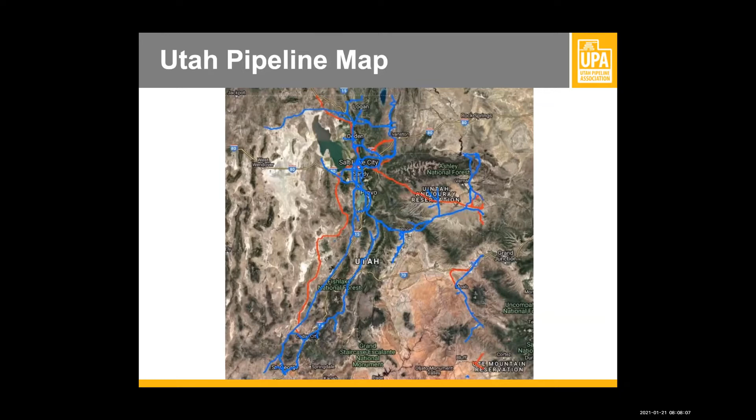I often get asked, what's the depth of our pipe? The only good answer I can say, or what our current running line is, it varies and it depends. The only way to really know is to have that line potholed, because several things can happen over the course of time since the pipe's been in the ground.

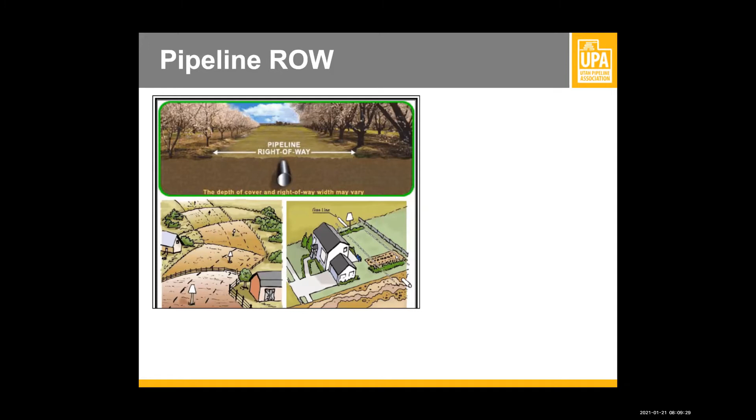There might have been an underground obstacle they had to try to go over or under. As land starts to develop, let's say it's farmland like in the bottom left-hand corner, you might start going through cultivated fields, but then as development progresses, we might have a line that runs behind some homes or close to where people live. In those cases, the grade has a potential to change over time, so the depth of what we initially installed the pipe might not be the depth of where the line's currently at. That's what makes it difficult to answer that question.

We're going to jump over to Coalville for a second. This is a cultivated field that you might end up running into. The only way that you would know that we've got one of these transmission lines running through this area is by a marker right here on the line. And then as time builds up, sometimes we'll even have instances like this where structures will be built right next to the pipeline right-of-way.

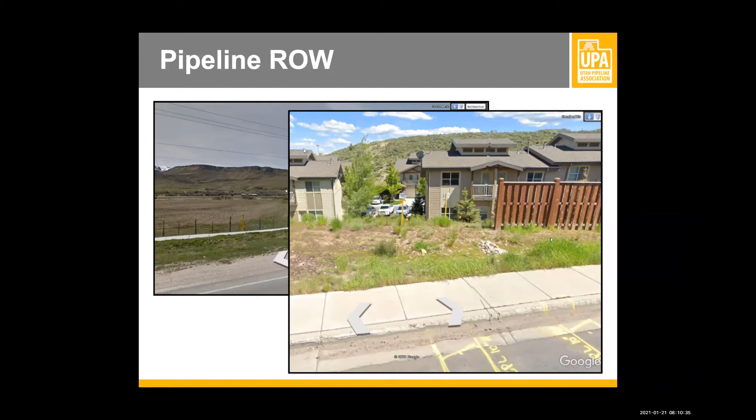It's nice in this photo, you can see that someone had called out and there are some blue stake markings on the ground. It could be in any of these situations, whether there are homes or no homes around, where you potentially could have some of these lines.

Now besides crossing roads, sometimes these lines will end up paralleling a road, whether it's at the current time of installation or future development might come in.

And in that instance, we see up in this upper left corner, there's 2 pipelines that happen to run through a residential area. I'm going to jump over here and talk about this other photo I've got, switching over to Google Earth.

As you can see here, down in the bottom left-hand corner, I've got some markings out on the ground. It says DEG, which stands for Dominion Energy Gas, high pressure 24-inch, and it's running right down the middle of that median.

Now, for an operator like myself, I can't necessarily place markers as we go down the middle of the road, that's not feasible. So I'm going to look around to see where we might find a marker for this line. As I turn, I don't have to go far, and I notice right here that there's a marker indicating the location of one of these transmission lines nearby.

Now, we learned a couple things from this scenario. One, pipeline markers aren't necessarily always above or directly above the pipeline, they're generally in the vicinity of it. And for a case like this where we might parallel the roadway, look for signs or markers that are on the edge of the roadway.

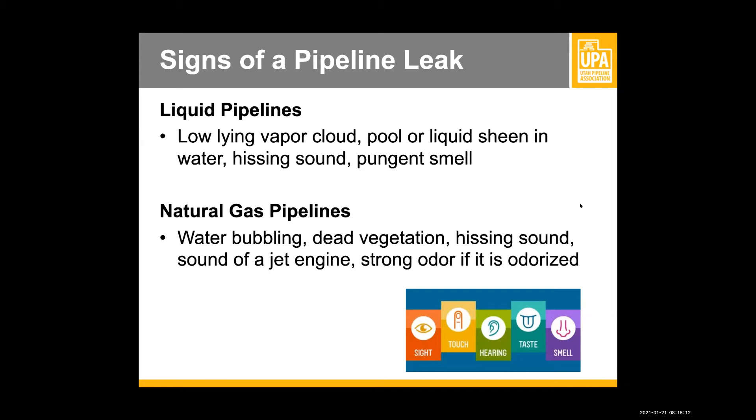It's odorless, and only when it runs in the distribution lines is it typically odorized. So smell is not the only indication of a natural gas leak. Transmission lines, what we've been talking about, generally run in the hundreds of pounds with larger diameter steel lines. But that doesn't mean the smaller lines are necessarily safer to dig around. This instance came up in 2019 in North Carolina, and this was only a 3/4 inch service line that ran from the main into the building, and the line pressure wasn't even very high. So pressure is not necessarily an indication either. It only ran at 4 ounces of pressure, which is 1/4 PSI.

That's usually approximately what all of your appliances run at in your home. What had happened is a horizontal directional drill company had set up a machine and were installing some sort of conduit, and they failed to daylight or pothole the service line when they crossed it. They ended up hitting it, and gas got into the building. The result, as you can see from the photos, 2 individuals died and 25 were injured.

Now, this example about a liquids line is a little older, about 20 years old, but I really liked it because it explains a couple things. One is that it's the fumes from these liquid lines that burn, not the liquid itself. And if it gets into a waterway, as we can see here, the fumes ignite and it can cause the product to spread a lot quicker and cause a lot more damage a lot faster.

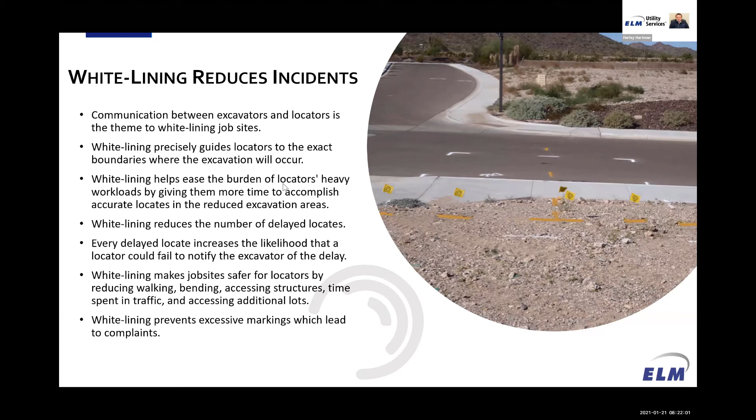White lining prevents excessive markings, which leads to complaints. So some of the reasons to white line every time: information provided by the excavator working in the field is often difficult to describe to the one-call center. Locate tickets called in by office personnel who are often unfamiliar with the physical area can create confusion. This typically results in requesting larger areas for the ease of the requester, but creates unnecessary effort and time spent for the locators.

So some tips for white lining. Identify your company's name and/or blue stake ticket number in the white lined area. Photograph the white line markings and geotag the images with GPS information. Include fixed reference points in your photographs to document your work areas.

Ensure access is available for locators. If you don't have white paint, use white flags or stakes, and when using a single flag or stake, always include the radius of the flag or stake. Ensure location of job site is correct to prevent further delays.

One question we get on white lining is, how do we use white paint in the wintertime? That's where the white flags come in handy. You can still write your ticket number or your company name on that white flag, and the directions on the ticket will lead us to those flags.

What often gets overlooked are the hundreds and possibly even thousands of times damages are prevented by excavators because they went the extra mile to white line the job site. From 12/1 of 19 to 12/1 of 2020, of all the jobs that ELM investigated, only 3.4% of those jobs were white lined. I really believe we've got room for improvement there, and it'll help the communication.

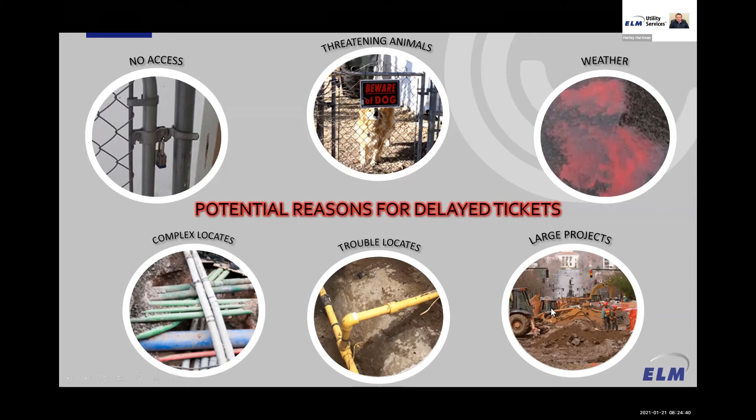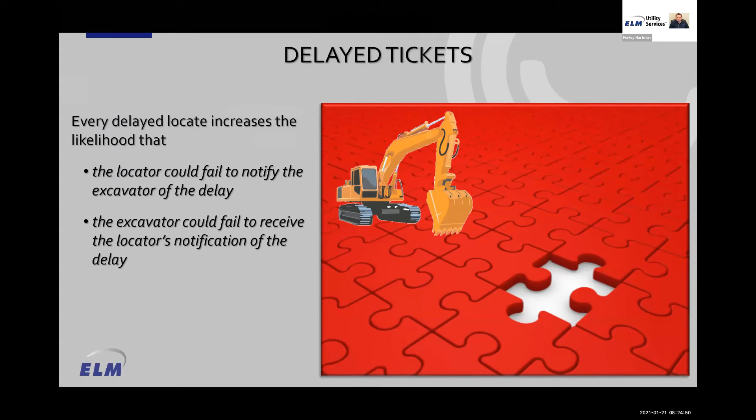Every delayed locate increases the likelihood that a locator could fail to notify the excavator of the delay, or the excavator could fail to receive the locator's notification of the delay.

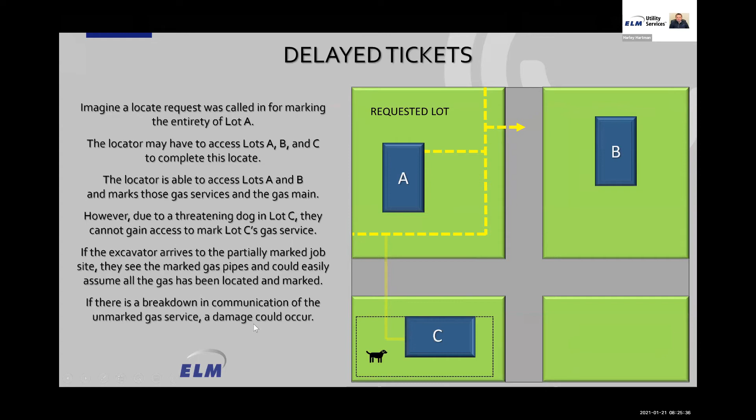Here's an example. Inspecting the job site and checking for delayed locate notifications prior to excavating is always recommended. If excavators see a facility that may be unmarked, please call for clarity to prevent a damage.

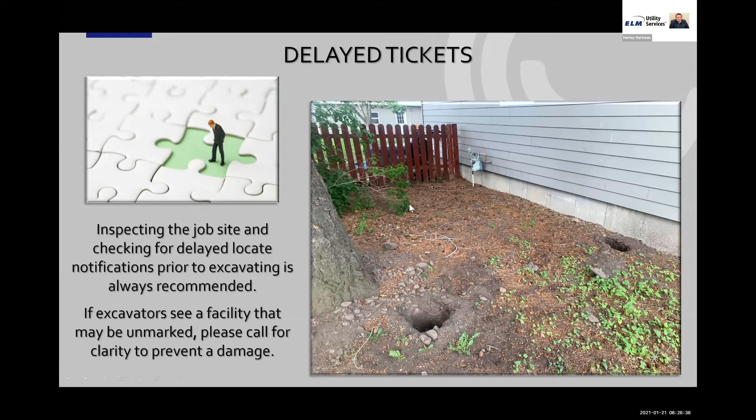You can see this gas meter up here on the front house, with no marks. Luckily this gas service went out front to the main in the park strip. Had that come back, it could have been a potential damage. So as an excavator, when you're out there and you see a structure with no marks around it, please give us a call back and we'll get a guy out to see what happened and what's going on there, so that we're not delaying your jobs.

So let's talk facility marks and labels. Some of the things you'll see out there: facility owner, abandoned, deactivated, size, material, pressure, duct package, casing, inserts, and offsets. Marks and labels help excavators identify exactly what is marked.

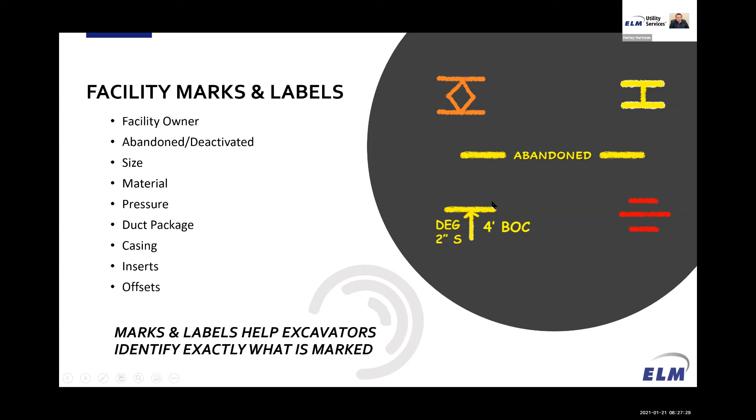The photo on the top right, you can see we've got a communication duct package, a high pressure gas, an abandoned gas, and an offset. What this offset's telling us is DEG, Dominion Energy gas, 2-inch steel, 4-foot back of curb. Over here on the right, we've got a 3-phase electrical line. So be watching for these markings out there so that you know exactly what you're looking for when you're potholing.

If they believe they have found the active gas pipe, they're likely to stop hand digging and potholing and start digging again with mechanical equipment, damaging the active 2-inch plastic gas pipe. Labeling the size and material of the facility helps excavators prevent these types of damages.

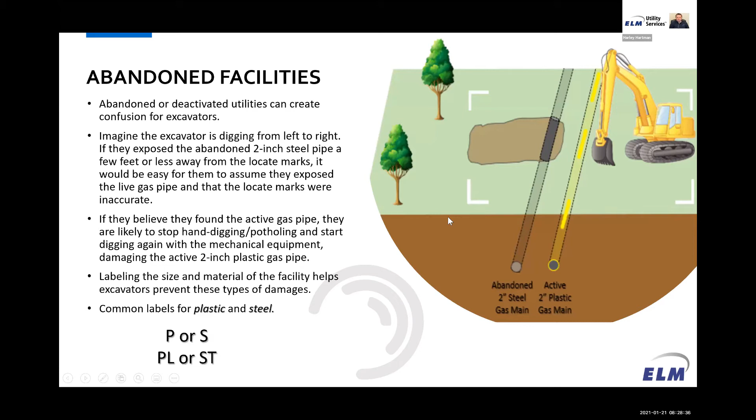Common labels for plastic and steel, you'd see a PS, P or an S, or a PL or ST. So be watching for these labelings out here as you're digging. And if you've got any questions, please reach out to us and we'll send somebody out to clarify what's going on with the markings or the question.

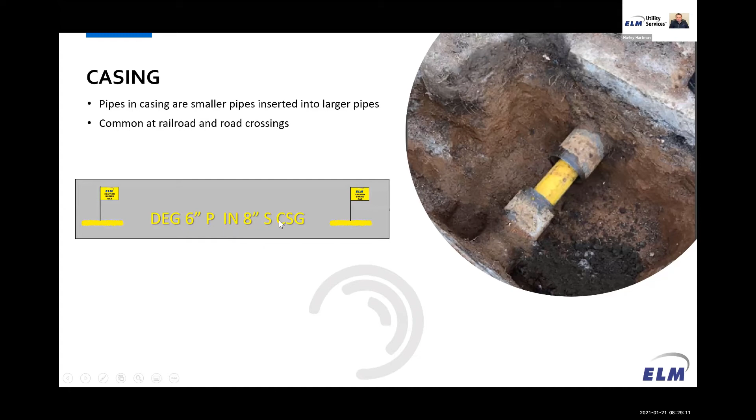Just want to talk casing for a minute. Pipes in casing are smaller pipes inserted into larger pipes, common at railroad and road crossings. Photo on the right, you can see we've got this 6-inch plastic pipe going through this 8-inch steel casing. This photo on the left is how you'd see it labeled on the ground: Dominion Energy gas, 6-inch plastic in 8-inch steel casing. So when you're potholing and exposing that, you'd be looking for that 8-inch steel, not that 6-inch plastic.

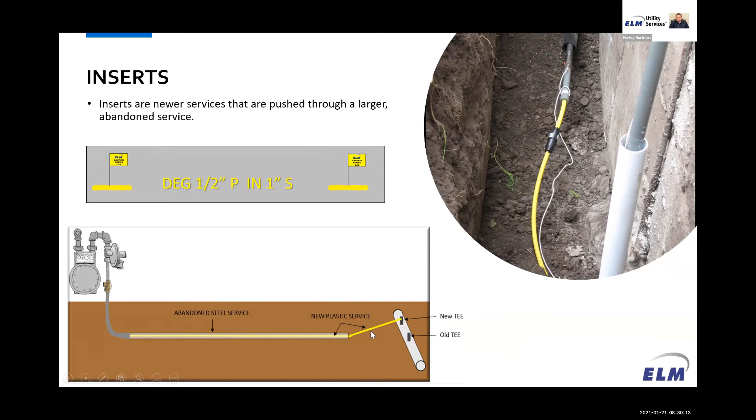But if you look at this bottom photo on the left, you can see depending on where you're potholing, this is what you're going to be looking for, whether it's that 1/2-inch plastic or that 1-inch steel. If you're up close to the house, you might be looking for that 1/2 inch plastic. More out in the yard, you're probably going to be looking for that 1 inch steel, and then closer to the main, you're going to be looking for where it taps into that main, where you'll be looking for that 1/2 inch plastic. So depending on where you're potholing, anytime you've got questions, please reach out to us.

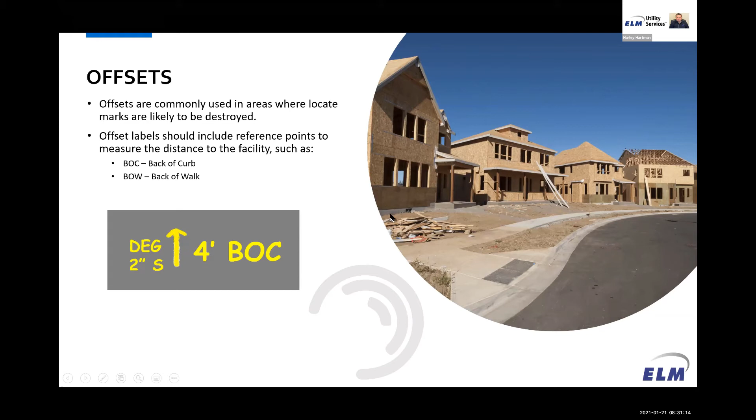So in summary, in our industry, specific markings communicate important information to excavators. They are designed to prevent damages. Markings alone are not always sufficient in every situation. Additional methods of communication may be necessary to make sure everyone is informed to protect the people, property, and the facilities.

So examine the white line dig area below, called in for 400 Alpha Street. The locator communicated to the requester that the ticket was incomplete due to no access at the address of 401 Alpha Street. The requester arrives on site and sees the yellow paint marks below. Can I get the first polling question, please?

So is this job site safe to begin excavating? Yes or no?

Should be getting closing here in a minute.

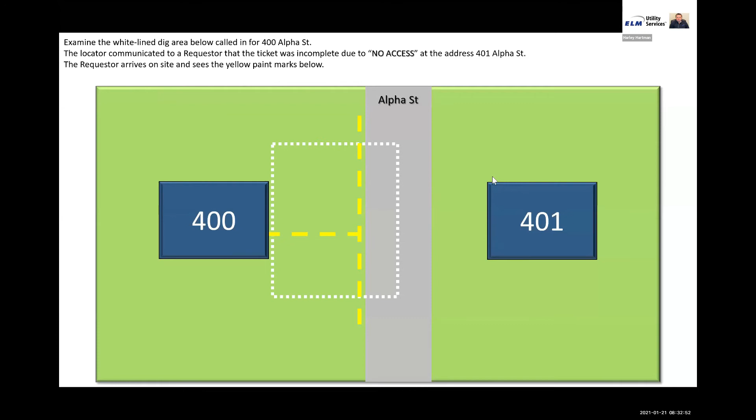All right, 75% of you are correct. That is not safe to begin excavating, as we would need access to 401 Alpha Street for the utilities coming off of this property that could potentially go into your dig area over here. A lot of times the gas and other utilities could cross the street as well. Okay, so take a look at that diagram at the bottom there.

The gas main is labeled correctly in the diagram below. The requester exposes a 2-inch steel gas main.

Second polling question, please. If the gas main is labeled correctly and the requester exposes a 2-inch steel gas main, has the requester exposed the active gas pipe main? Yes or no?

I'll give you a few seconds here to answer. Hopefully you're all on your buttons.

All right, 63% of you are correct. If we look at that diagram again below, we've got this gas line going up to the house labeled as 3/4 inch plastic. This one out in the park strip, which is the main, is labeled as gas 2-inch plastic. So if you exposed a 2-inch steel, you have not exposed the active gas pipe. Be watching for those labels and know what you're looking for when you're doing the potholing.

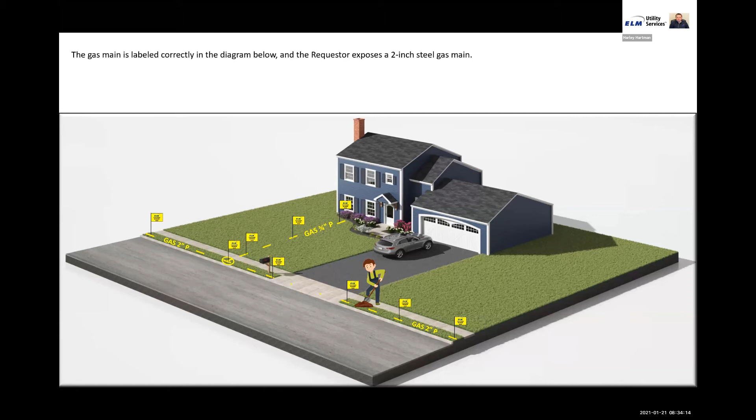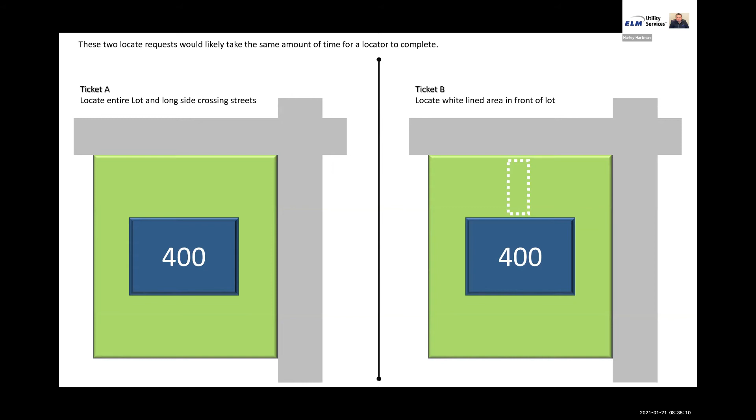Great, 88% of you are correct. False, it would not take the same amount of time. I like to give a visual on this one. If we look at ticket A on the left, by what was called in, this is potentially what the locators would have to mark out there. However, with ticket B, if we got it narrowed down to where you're actually digging, it actually saves a lot of work and eliminates a lot of unnecessary markings for the locator.

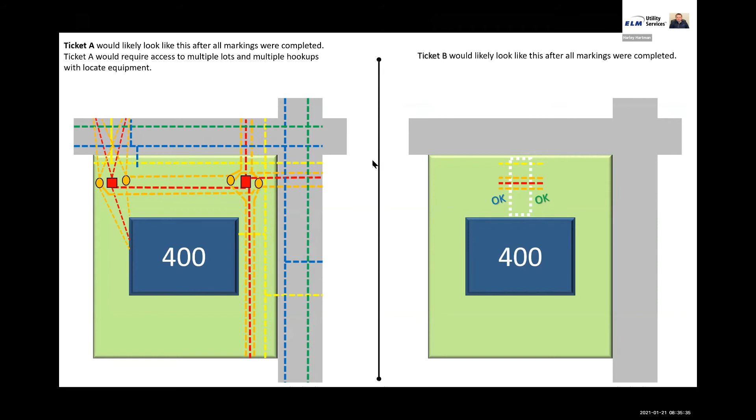Hello everyone, my name is Logan Vollinger. I'm going to be talking to you all a bit today about my group, Utah Pipeline Safety, and how we fit into the regulatory side of things when it comes to damage prevention in particular.

Most of y'all probably heard of PHMSA, the Pipeline and Hazardous Materials Safety Administration. They are the federal group that has delegated compliance with the Code of Federal Regulations to our group here at the state level. The Public Service Commission has adopted the federal regulations into our Utah State Code in Title 54, which we're going to talk about quite a bit today. In that Title 54, a number of chapters describe our authority and other rules regarding pipeline safety.

My group only regulates intra-state natural gas pipelines, meaning pipelines that begin and end within the state of Utah. The Public Service Commission gave my pipeline safety group that authority in Chapter 13 of that Utah State Code in Title 54 I mentioned earlier.

When it comes to hazardous liquid pipelines in Utah, those all fall under PHMSA's jurisdiction. Sometimes the industry refers to pipelines as DOT regulated. This refers to PHMSA and the regulations they develop and enforce. There are other aspects of the Department of Transportation, such as the FAA and other groups, but PHMSA is the one we deal with regarding pipelines in particular.